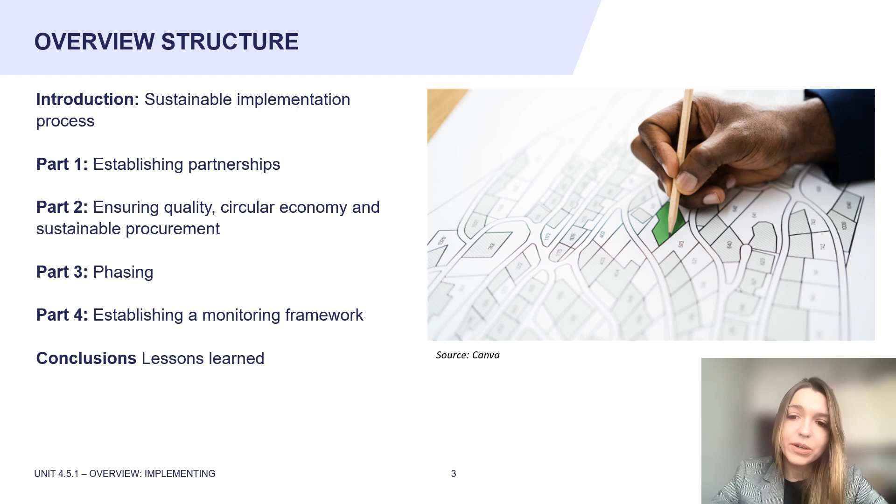In the beginning, let's focus on the sustainable implementation process. A sustainable implementation process is adapted to the community and the context. It integrates resources and zero-carbon targets with circular economy. It coordinates the community vision and the efforts of different stakeholders. The process aligns diverse interests and incorporates multiple perspectives into a shared long-term vision. It ensures a long-lasting commitment from the community and the local authorities. As well, it defines appropriate delivery mechanisms.

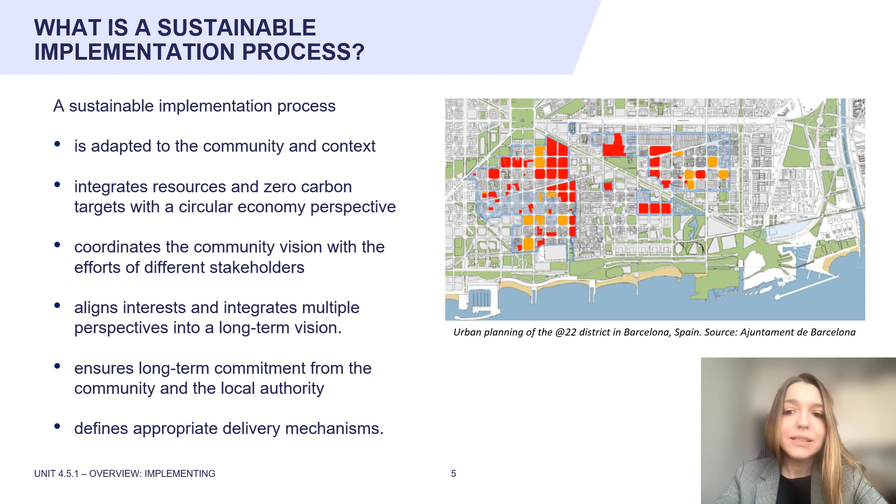In addition, a sustainable implementation process is adapted to the location and the context. It reflects the community needs, the market supply and demand, the funding sources, the site capacity, land ownership, the construction costs, engineering constraints, and the local planning policies.

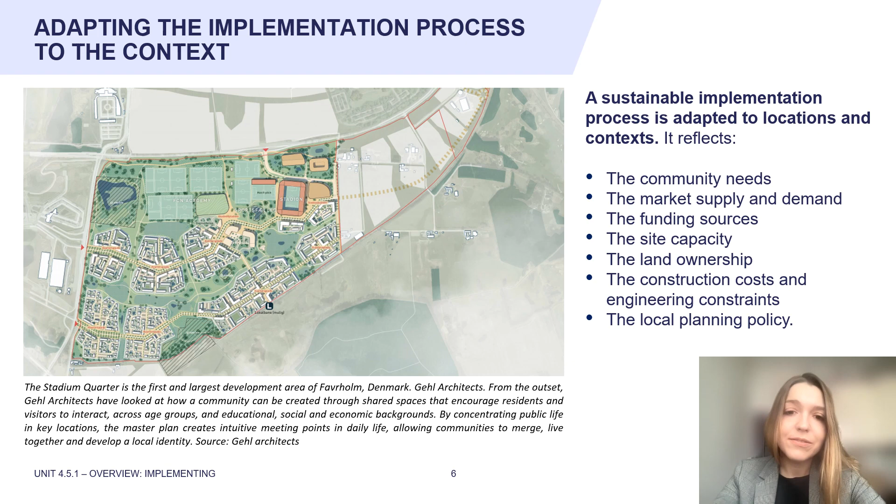In this project you see on the slide in Denmark by Gehl, for instance, by concentrating public life in key locations, the master plan creates intuitive meeting points in daily life, allowing communities to merge, live together, and develop local identity. Part 1 of the current training component is focused on partnerships.

Cross-cutting solutions need broad alliances for strategy, budget, innovation, and communication. All stakeholders should take part in defining the objectives and the vision of the project. City financing leverages private sector funding. While technical groups can tackle research challenges, a city agency can convey a common vision. Ultimately, all stakeholders have a role to play in attaining the zero-carbon targets while increasing livability, inclusivity, and economic vitality.

Involving multiple partners to deliver a common project requires a significant effort from the public sector side. This includes site preparation, master planning, design coding, and investing initially in infrastructure and the public realm. In Hammarby Sjöstad, as you can see on the slide, the agreement between the developer and the city included the design code. The local authority used the design code to grant planning permission and to provide guidance on the layout, form, and the structure of each block, with landmarks, public spaces, and pedestrian routes. Moreover, major public funding was key to deliver the project, with power, water, recycling all put in place initially.

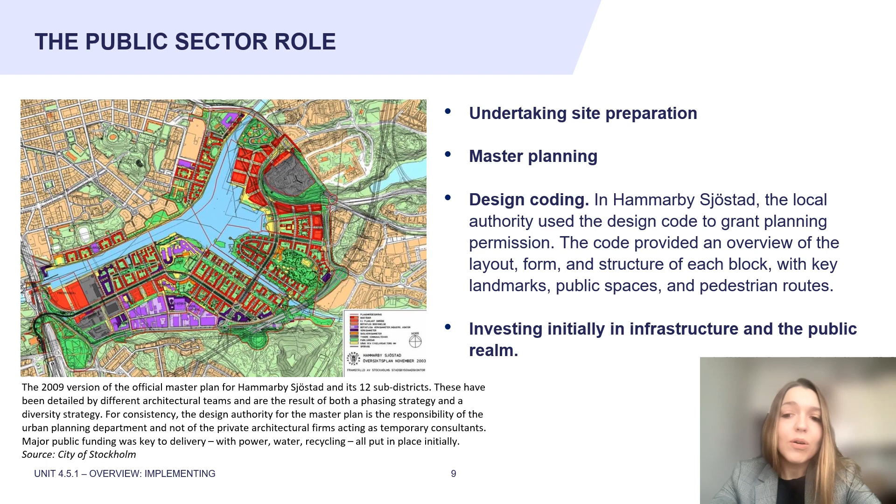In Hammarby Sjöstad, to foster diversity and inspire higher standards of design through competition, more than 60 developers and 30 architects were invited to design each plot or building. Several features ensured the efficient process. These include single public ownership, as almost the entire site was publicly owned at the start, and massive infrastructural investment.

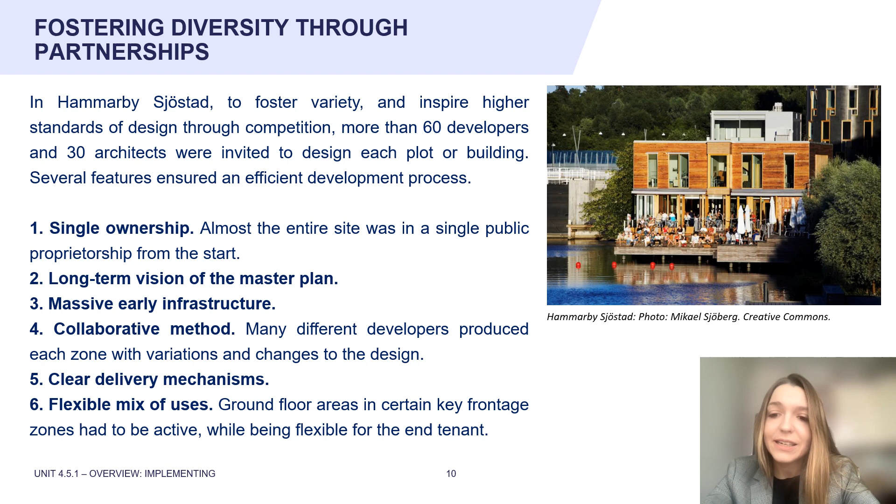Thanks to a long-term vision of the master plan and a collaborative approach, many different developers produced each zone with variations and changes in the design. A flexible mix of uses was encouraged. Ground floor areas in the key frontage zones had to be active while being flexible for the end tenant. Finally, clear delivery mechanisms were established by the public authorities.

A public-private partnership can ensure the funding of projects. Such partnership is between the public and the private sectors. Its purpose is delivering a project or a service traditionally provided by the public sector. The successful development and implementation largely depend on the stakeholders involved and the ability of the public institutions to integrate different views and aims. In Yongin City, for instance, anticipating an increase in travel demand based on Yongin City's development plans, in 1996 the municipality proposed such partnership to establish the Yongin EverLine Light Rail Transit.

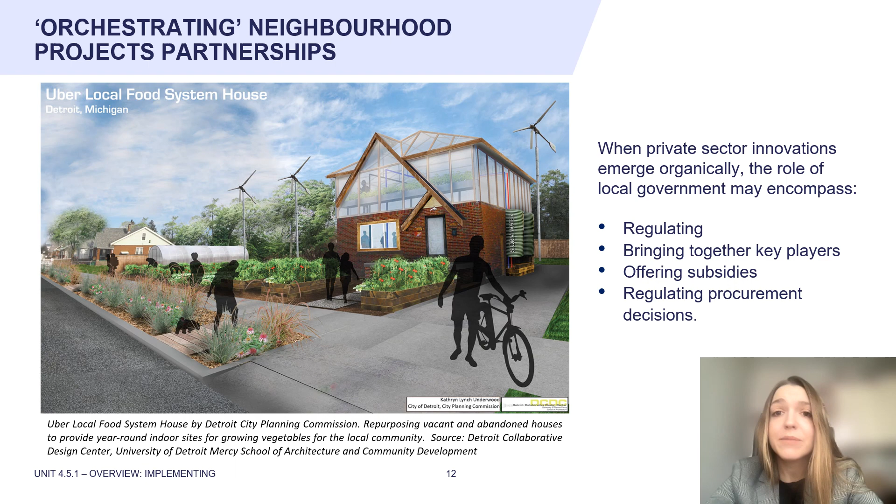That being said, when private sector innovations emerge organically, the role of the local government may encompass regulating, bringing together key players, offering subsidies, and regulating procurement decisions. The second part of the current component is focused on quality, circular economy, and sustainable procurement.

Implementing a sustainable neighborhood project will demand the support of many individuals. This involves understanding what is required, when, and by whom, grounding the design through collaborative work, and ensuring the place will reflect stakeholders' aspirations. The approach by Gehl in Buenos Aires, for example, leverages collaboration between government departments to create shared goals and break through silos, and creates a flexible framework with ambitious goals and concrete actions.

Establishing together the project vision and goals builds consensus on expectations. Collective working enables all parties to inform and influence the evolution of a scheme, avoiding conflicts downstream. Consolidating the governance minimizes potential delays and risk and clarifies roles and responsibilities. It identifies missions and outlines an implementation plan or a program. An example of it is in Nairobi, Mathare Valley. The project developed plans to improve the living conditions for over 150,000 slum dwellers.

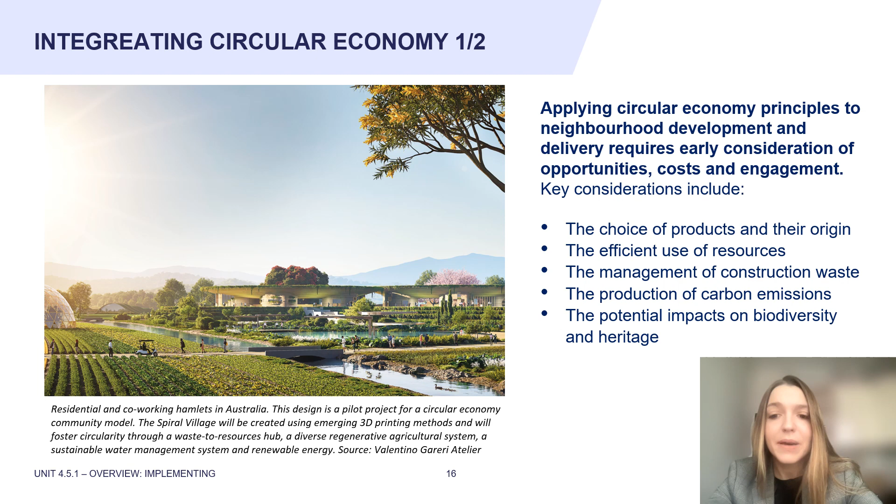Moreover, applying circular economy principles to neighborhood development and delivery requires evaluation of opportunities, cost, and engagement at the early stage. Key considerations include the choice of products and their origin, the efficient usage of resources, the management of construction waste, the carbon emissions, and the potential impacts on biodiversity and heritage. This pilot project in Australia, which you can see on the slide, is a circular economy community model. The Spiral Village will employ emerging 3D printing methods and will foster circularity through a waste-to-resource hub, a regenerative agricultural system, a sustainable water management method, and renewable energy.

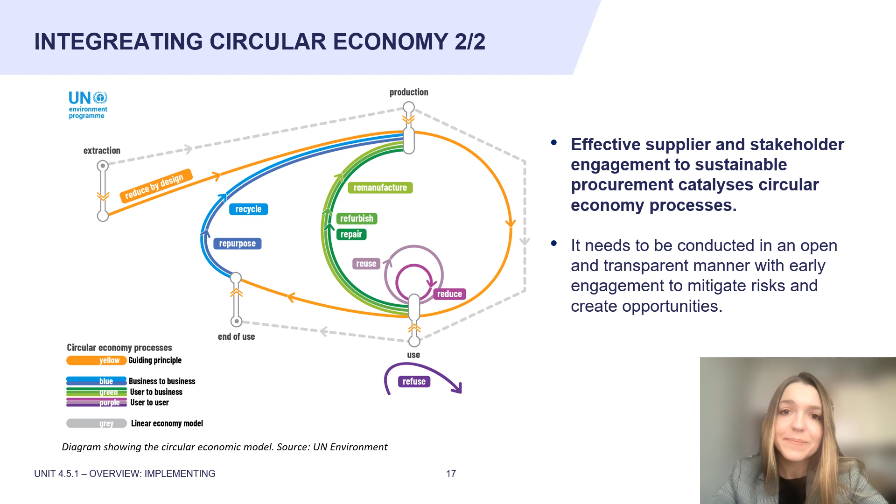Integrating circular economy in projects also involves effective supplier and stakeholder engagement for sustainable procurement. It needs to be conducted in an open and transparent manner with early involvement to mitigate risks and create opportunities. Sustainability requirements need to be specified. This should include a clear methodology on evaluation and monitoring, the financial and legal obligations of each partner, and a weighted scoring mechanism reflecting the criteria to evaluate the offers.

On the slide you can see an example from the Netherlands. The objective of this sustainable floating community in Amsterdam is to harvest ambient water and energy for use on the site, cycle nutrients locally, and create an environment supportive of biodiversity and human health and well-being. The project is guided by a comprehensive sustainability plan with goals in 9 key areas.

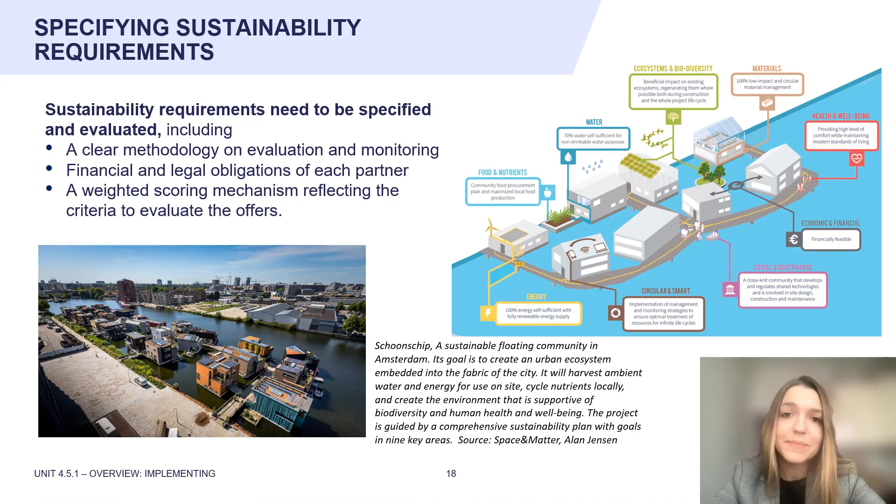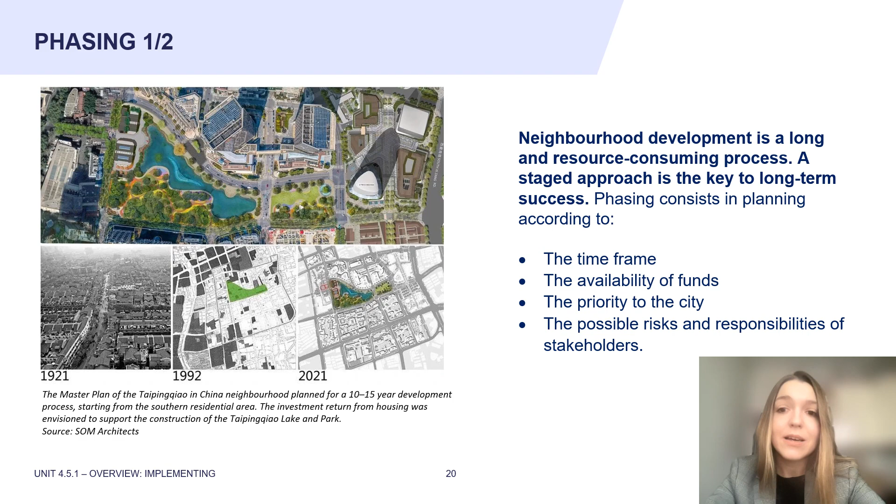In the third part, we will talk about phasing. Neighborhood construction is a long and resource-consuming process. A staged approach is the key to long-term success. Phasing consists in planning according to the time frame, the availability of funds, the impact on local communities, the priority to the city, and the possible risks and responsibilities of stakeholders. An example is the master plan of Taipingqiao, a neighborhood in China, planned for a 10-15-year development process. Phasing should allow flexibility to respond to changing market circumstances.

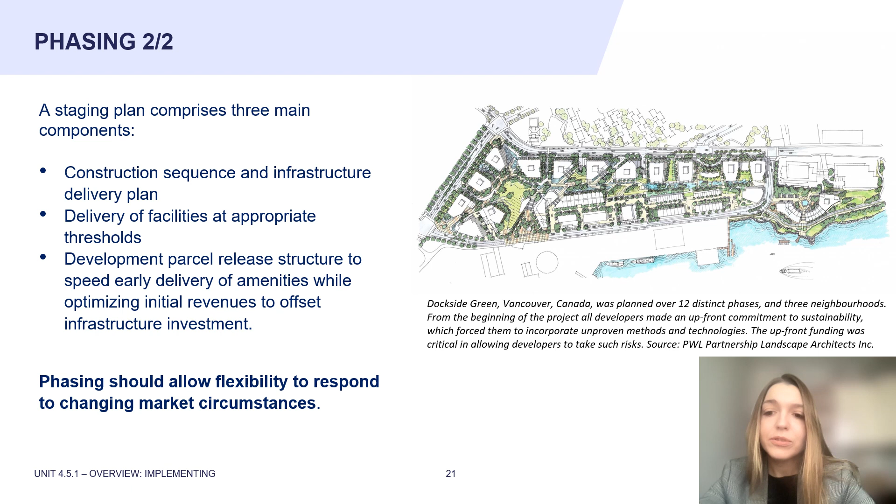A staging plan should include 3 main components. First, construction sequence and infrastructure delivery plan. Second, delivery of facilities at the appropriate stage. And third, a development parcel release structure to speed early delivery of amenities while optimizing initial revenues to offset infrastructure investment. An example you can see on the slide is Dockside Green in Vancouver, Canada, which was planned over 12 distinct phases and 3 neighborhoods. From the beginning of the project, all developers made an upfront commitment to sustainability. The upfront funding was critical in allowing developers to take risks.

In the last part of the training component, we will talk about establishing a monitoring framework. Key performance indicators, as you know, KPIs, can be used to test the performance of the neighborhood for carbon emissions and quality of life during planning, design, construction, and operation. They can be grouped into reporting metrics, tracking the performance, and monitoring metrics, tracking broader progress. The diagrams on the slide show examples of KPIs recommended by C40 and Arup for estimating carbon emissions.

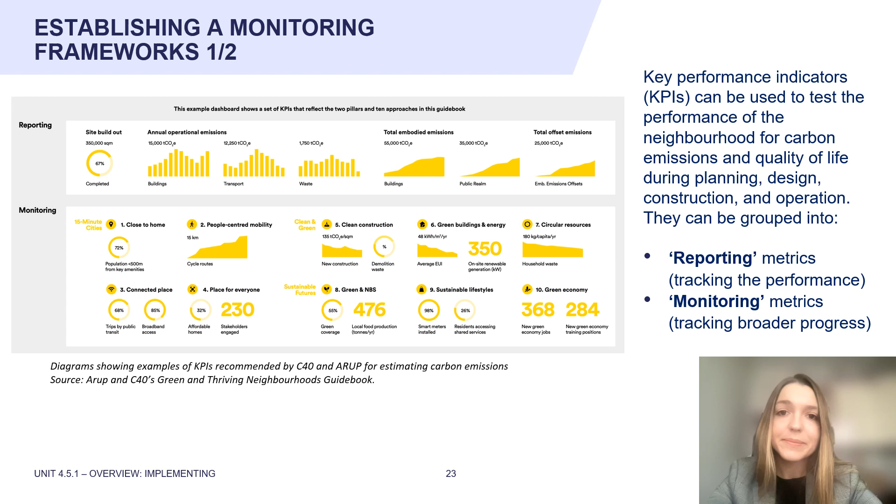The KPIs will draw on quantitative metrics, geodata, and qualitative information about the neighborhood, sourced from the residents and other stakeholders. To ensure that the benefits of the development are distributed equitably, the KPIs need to be disaggregated according to all relevant demographic and community groups. This map of New York, for example, shows the correlation between severe rent burden and race.

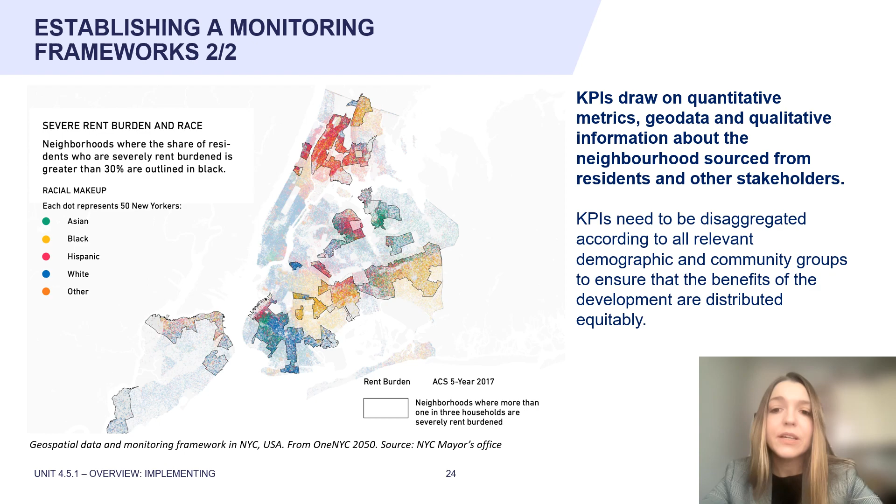And in conclusion, let's focus on the key highlights of the current training component. Securing partnership fosters innovation and shares the burden associated with risks. Ensuring quality requires a collaborative approach to produce a strong shared vision. Phasing manages and adapts the project to availability of funds, risks, and time constraints. A monitoring framework is important to track the project development and the impact of decisions on the carbon footprint and livability. We hope that this training material is useful for your work, and we wish you good luck.